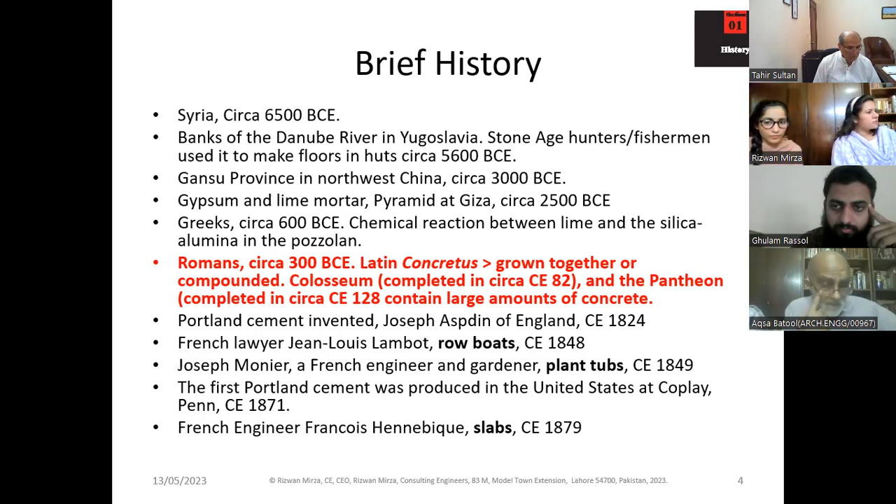I'll begin with a brief overview of the history relevant to today's topic. Instead of reading the slide, I'll just say that the present name of concrete is traced back to the Latin word concretus, which means grown together or compounded. Romans made extensive use of concrete in their buildings. The most well known of these are the Colosseum, CE 82, and the Pantheon, completed around CE 128. They contain a large amount of concrete. But as we will see, the concrete as we know it today was quite different from concrete that can be traced back more than 6,000 years.

The Egyptians also made use of materials which were akin to concrete, but again, not the concrete as we know it today. The Great Wall of China also has materials which are akin to concrete, but not the concrete as we know it today.

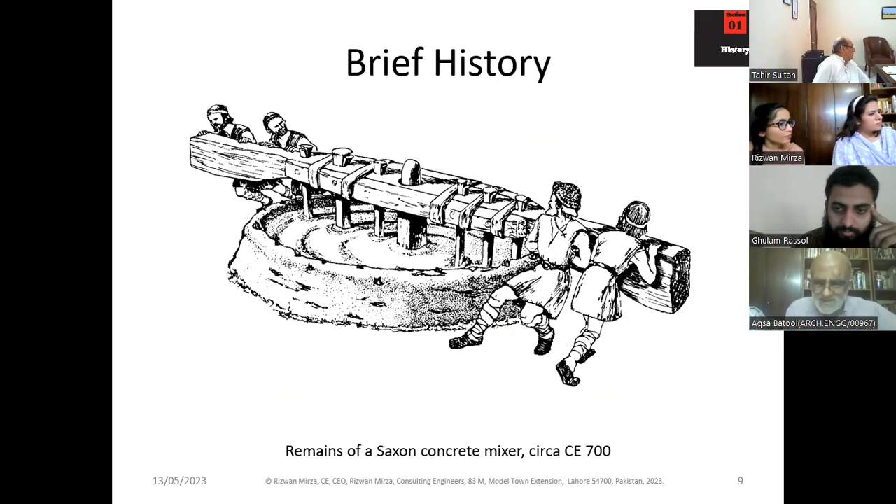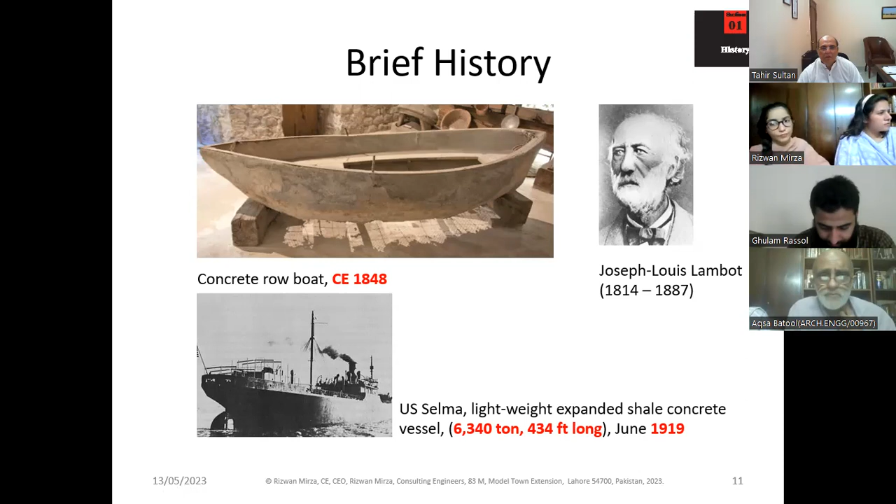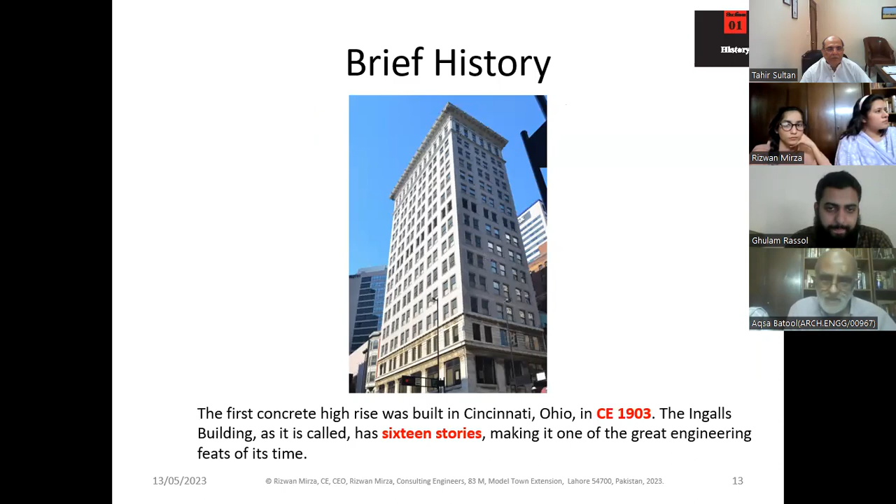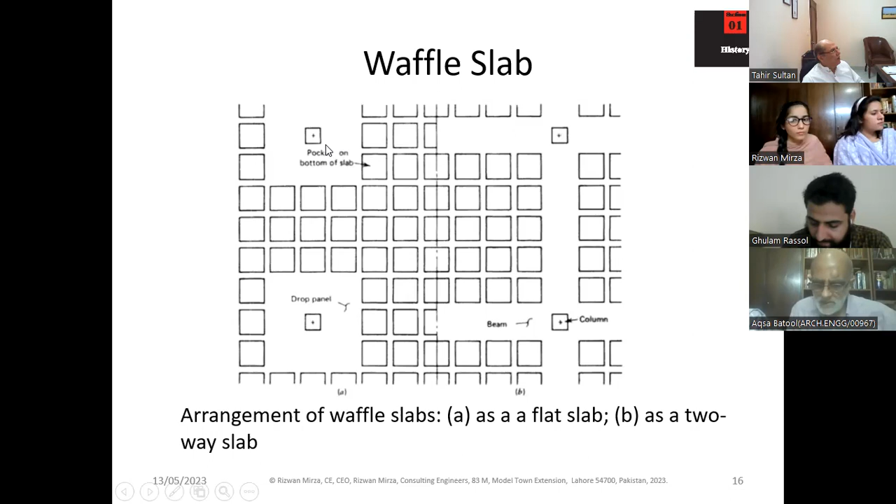So this is a typical arrangement of a waffle slab, with waffles at the bottom. There may be solid lines running along the grid lines, and there may not be solid lines running along the grid lines. This depends upon the choice of the designer.

So the trick would be to reduce the load through the introduction of empty spaces. These empty spaces are a double-edged sword because while you save on concrete, you lose on formwork, because the cost of the formwork would outweigh the advantage gained through reduction in concrete. So as a necessary corollary, larger spans are economically handled when the formwork is repetitive, used at more than one location. Otherwise, even at one location, if one has to handle a large span in concrete, this can be used.

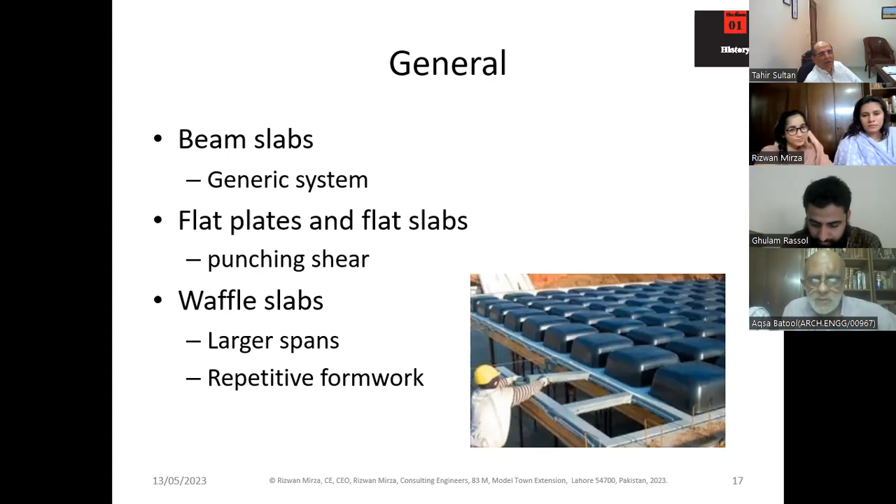This is an introduction to how slabs behave. They behave elastically. There are negative and positive moments, causing tension at the top or tension at the bottom. Within the spans, there is tension at the bottom, and at the top of the supports, there is tension at the top.

While if you continue to load the slab beyond the elastic range, after yielding starts in the reinforcing steel, plastic hinges would be introduced. As the plastic hinges form at locations of high moment, the moment may be redistributed, provided there is enough capacity at the span locations. This means that if the spans have been designed for larger moments than required by elastic analysis, there will be capacity in these spans to receive the moment shed by the supports through the formation of hinges, and the total moment remaining the same, the moments will be redistributed from the supports towards the span, provided there is capacity within the spans.

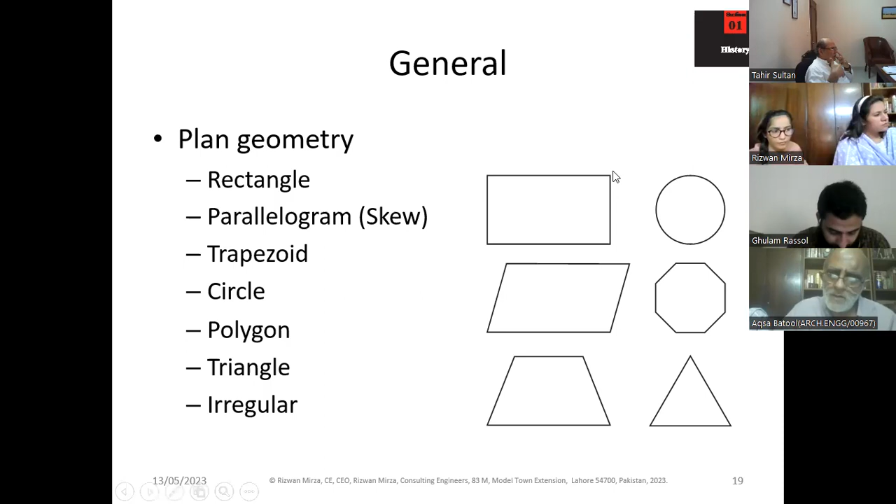This is just an opportunity to recall the various types of slabs that one may encounter during practice, and the diagrams speak for themselves, except that the second diagram at the left here is a skew slab. It enjoys a special position, encountered primarily in bridges, and the bending moments are increased because of the introduction of a skew. Otherwise, these slabs can be handled by one or more of the techniques. More on it later.

The loads can be uniformly distributed. They can be linear, line loads, as we see here, as introduced by the presence of partitions, and they can be concentrated, as we see here - a column sitting somewhere within the span itself with no support underneath. This is a concentrated load, and there may be loading in the nature of a moment at the end of a slab.

This diagram recalls that the location of the loading points needs to be carefully handled, because if you load all the spans at one time, you may not be able to achieve the maximum positive moments or maximum negative moments as required. The first diagram you see is the influence line diagram for span AB. If you load this span and then every alternate span by 75% of the live load, as the codes permit you to do, you will achieve the maximum moment at this location. So this diagram shows: load this span, this span, this span, and do not load these other spans.

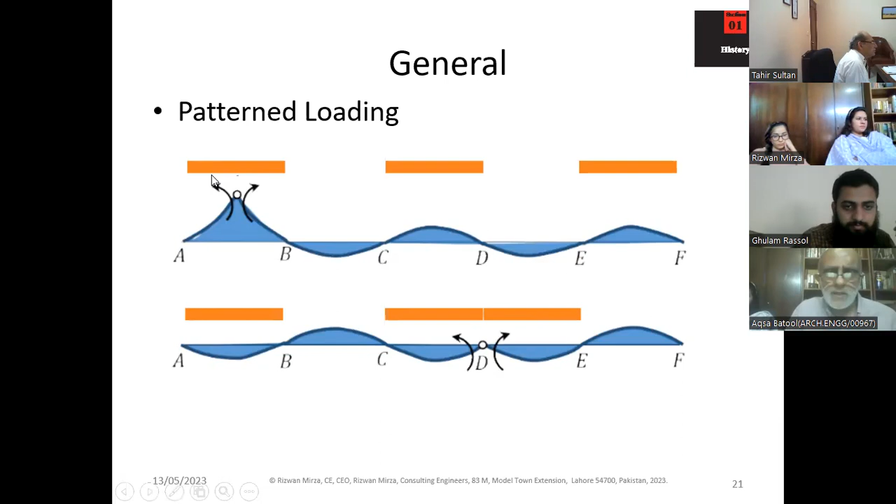The loading would be introduced at the two adjoining spans and then at every alternate span. These diagrams have been prepared using the Müller-Breslau principle, which gives a unit rotation at the location where you are interested in the relevant stress function, in this case the bending moment. So sliding is not permitted, shear is not allowed to perform work, while only rotation is performed, and this angle between the two tangential lines is unity. You can read about it in any standard text on structural analysis.

When you approach the design of a slab, you handle strength and you handle serviceability. Serviceability caters for deflections, it caters for cracking, and it caters for vibration. So you must not be oblivious of the duty to handle serviceability.

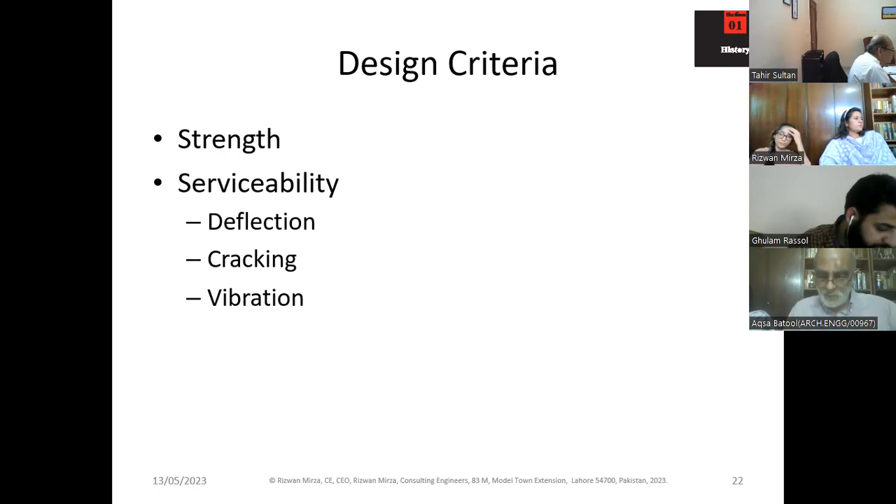Providing reinforcement may not be the sufficient step for ensuring that the slab doesn't fail. Failure does not mean collapse. When a slab, or any element for that matter, fails to perform the intended function, the intended purpose, it is said to have failed. So failure would be characterized by the failure of the element to perform its designated duty.

Now for analysis and design. I'm proceeding rather quickly, I'm aware, but I wish to cover as many aspects as I can so that you can read about these aspects later and fall back on what we talk about here, so that you don't miss out on anything. Slab is a very complex subject.

As you would notice, my chapter or section is a hybrid section, labeled as analysis and design. This is a unique or singular example in reinforced concrete, where the concrete codes of practice provide unified guidelines for analysis and design, because slabs are not very easy to analyze. They are very complex elements. So the designer, working in a design office, needs to be provided mechanisms for analysis as well as for design.

So to keep things simple, I would tend to classify your analysis into two parts: elastic analysis and plastic analysis. Finite element has been mentioned here. It's just a numerical technique which handles cases where the loading is very unusual in its disposition, and where the edges may be very unusual in their geometry, and where the geometry in general is crooked. So one can very easily handle such situations using the finite element technique, choosing the appropriate finite element type, geometry, and size of the finite element itself.

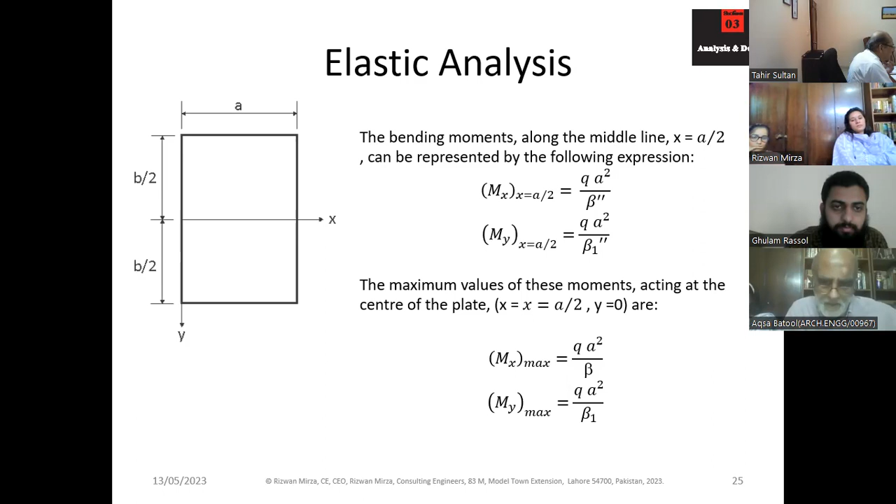These are the coefficients. Mx is the bending moment in the shorter direction, which means stretching the fibers along the x-axis, and My is the moment in the longer direction, which means stretching the fibers along the y-axis.

A short remark at this point would be relevant: the definition of the moment by classical mathematical technique is providing a subscript of the axis around which the rotation, the curl of your finger, defines the direction of the moment. By that concept, you point your thumb along the y-axis, and the curl of your finger provides the positive direction of the moment, which is different from what most software in the market today uses. They designate a moment which is stretching the fibers along x-axis as moment xx, and the moment stretching the fibers along y as moment yy.

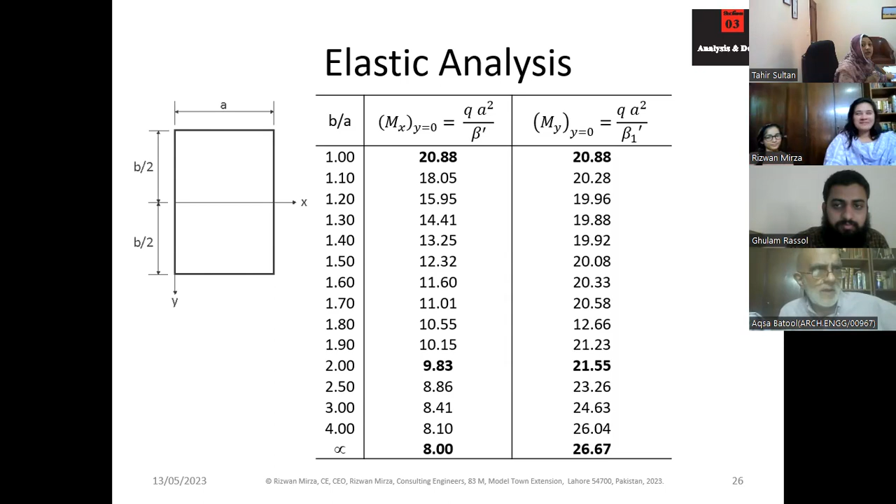So there may be a pitfall for some who are not very careful.

Now, an important thing I wish to highlight is that previous versions of the ACI code, dating back to the 60s, provided coefficients for the analysis of rectangular slab panels. What I need to emphasize here is that those moments were lower than the moments provided by elastic analysis.

This is WL squared by 20, while this is WL squared by 27. This is WL squared by 18. This is WL squared by 22. This is WL squared by 9.83. This is WL squared by 11.35. So there's a reduction in the X direction moment of about 25%, and it gradually lowers. Again, there's a clear trend that the code-based moments are lower than the moments determined according to elastic theory.

The contribution I can make today is that there is a reason why these moments have been kept at a lower value: you have been provided guidelines for designing the slab as a whole, and you provide reinforcement for a large width based on the same moment, recognizing that there is a transverse redistribution of the moments. The adjoining strips would be sharing the moments that first appear on the central strips, which are subjected to the peak moments. So the transverse redistribution has been recognized and used to cut down the peaks to lower levels.

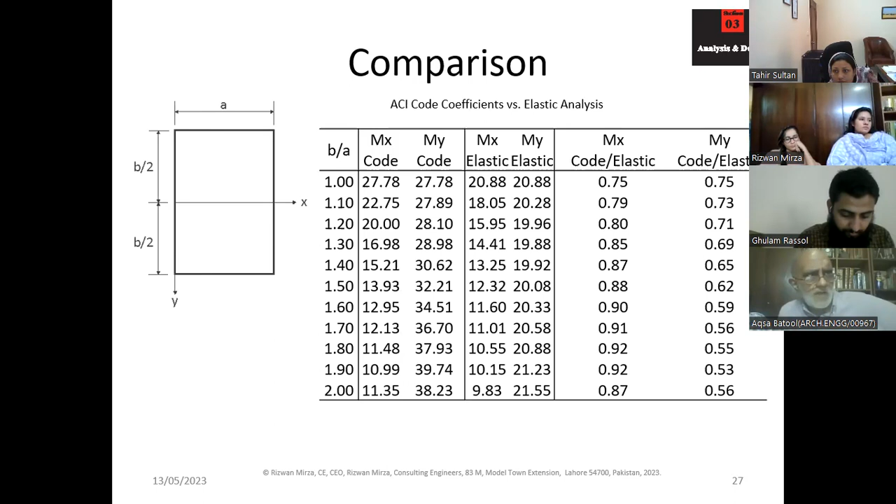This is one reason. Second, there was testing at that time in various universities which determined that the actual load withstood by reinforced concrete slabs is higher than that predicted by elastic analysis. Third, the yield line theory had appeared by that time, and use was made of the modified yield line theory to change the options provided within the slab.

Hence, to summarize, one should expect that the code-based elastic moments, as they appear in older textbooks and older versions of the codes, are lower than those we can notice in the classical textbooks of theory of elasticity.

Now, I have a very limited time, so in some locations I will just be identifying the principle and will not spend as much time on each slide as I did on the previous slides. This is a triangular slab, and I just wish to say: take an inscribed circle and design this slab as an inscribed circle, providing that reinforcement for this triangular slab.

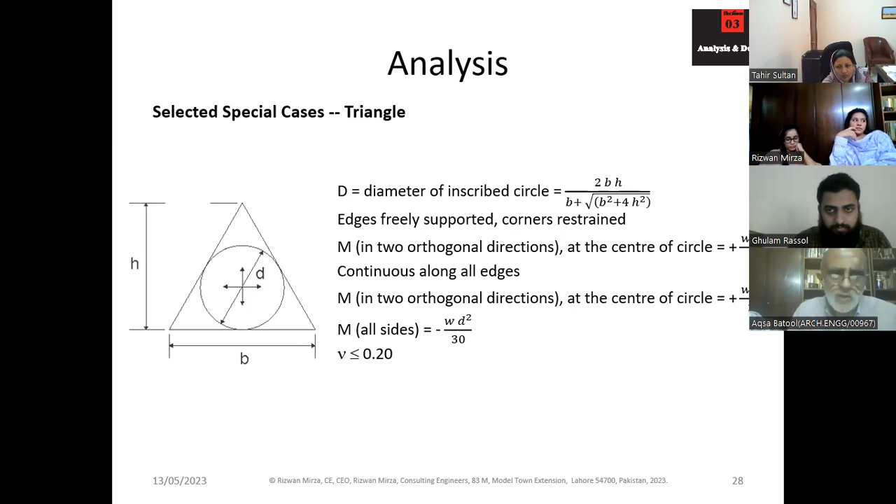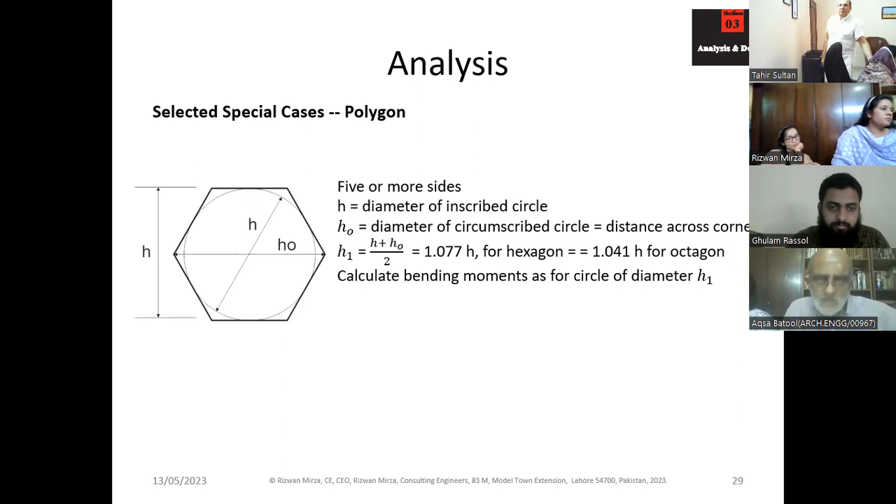This is a polygon, and if it has a number of sides which is 5 or more, again design this as a circle. The inscribed circle has a diameter h. Use that diameter and design the slab.

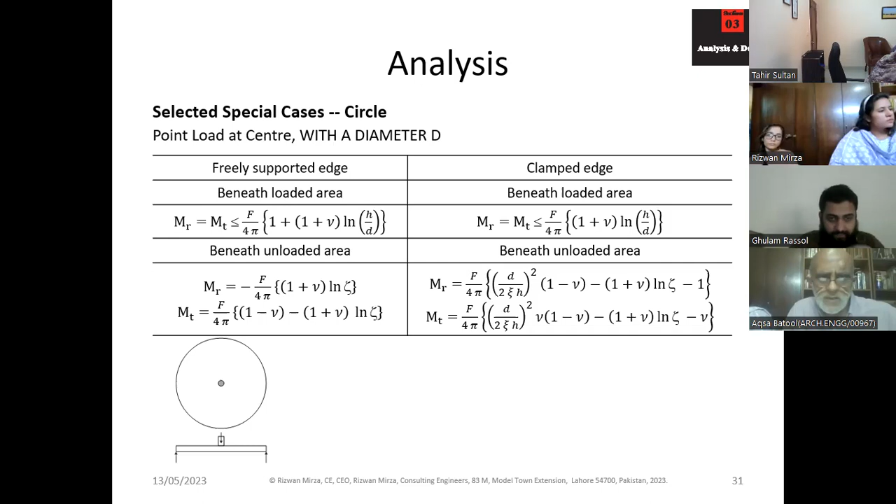Now, a very important and common issue related to slabs is handling the line loads, the partition loads, through European guidelines, probably handling very low weight partitions.

If Q is equal to about 68 pound per foot, or less than 68 pound per foot, our Q is between 137 and 68.5 pound per foot run, and for cases where Q is less than 205 but greater than 137 - these are very lightly loaded partitions. So you end up, according to these guidelines, with loads equal to 10.44 pound per square foot, 16 pound per square foot, and 25 pounds per square foot.

By the way, these guidelines are not very different from what you will encounter under the British standard, which is more general, where you are not restricted by the loading that have been provided. This just says that if you know the loading per linear foot of run of your partition in pound per foot, divide it by 10 and you get the load in pound per square foot.

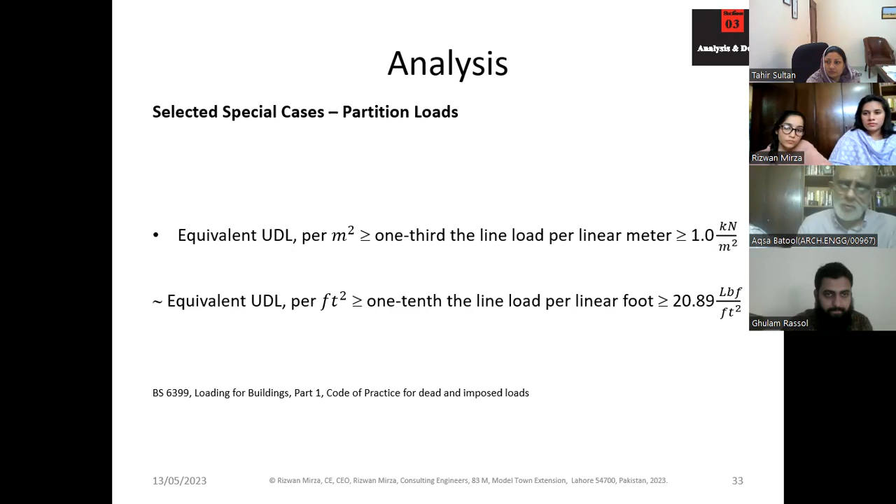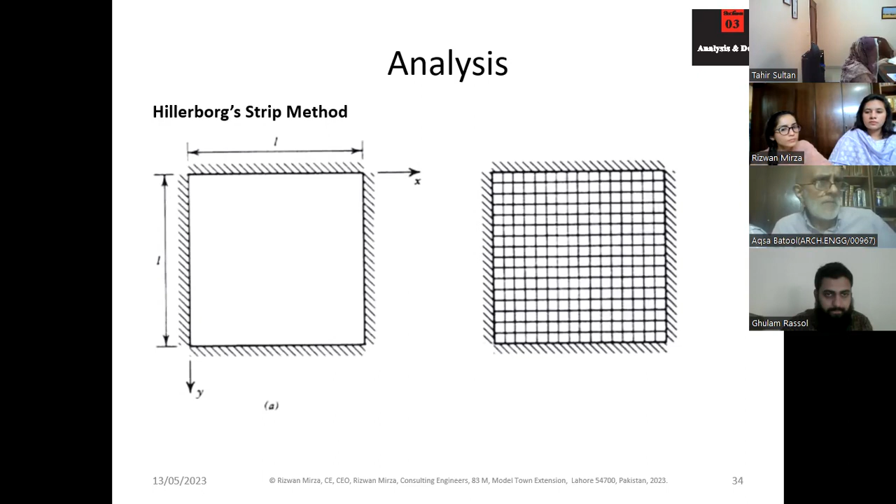I have developed guidelines for you. Again, this is very arbitrary. You can handle it either by dividing the slab like this, dividing the slab like this, or dividing the slab like this. In the first part, you say that 50% of the load is taken in the x direction, 50% of the load is taken in the y direction. So W by 2 in the x direction, W by 2 in the y direction.

And you get W by 2 into X square by 8, which is WX square by 16, as the bending moment in the X direction, while the moment in the Y direction is again WY square by 16. The distribution between X and Y direction can be made assuming that the fraction of the loading in each direction would be the length of the opposite direction raised to the fourth power, divided by the length of that direction raised to the power 4 plus the length of the orthogonal direction raised to the power 4. So that can be used as your guess. It remains a guess - this is not an elastic analysis.

This again is another method by which you divide the slab into edge strips and the middle central strip of L by 2, and edge strips of L by 4. And here you assume that 50% of the load is going in this direction, 50% of the load is going in this direction, assuming that the slab is square.

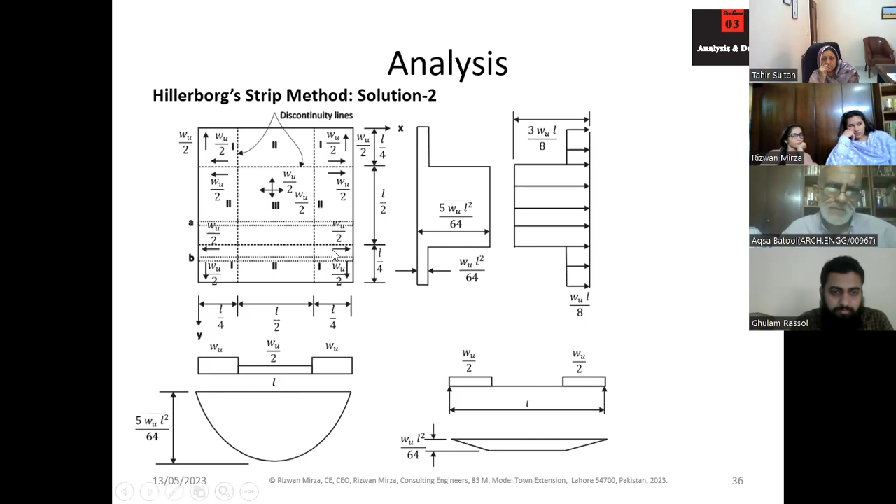This is what other theories also suggest, that the edges are subjected to very low forces when they are supported edges, that is, when you are separately designing the beams, not coupling the design of the beams along with the slab. According to some codes, if the edges are very rigid, say like walls, or if you are separately designing the beams, these areas can be designed using minimum reinforcement, temperature and shrinkage reinforcement.

This is a third method. I will not waste a lot of time here. Let me move to yield line theory, which is another plastic analysis technique. Yielding starts in the slab in this direction. It proceeds towards the corners, and a mechanism is formed when the yield lines have reached the corner.

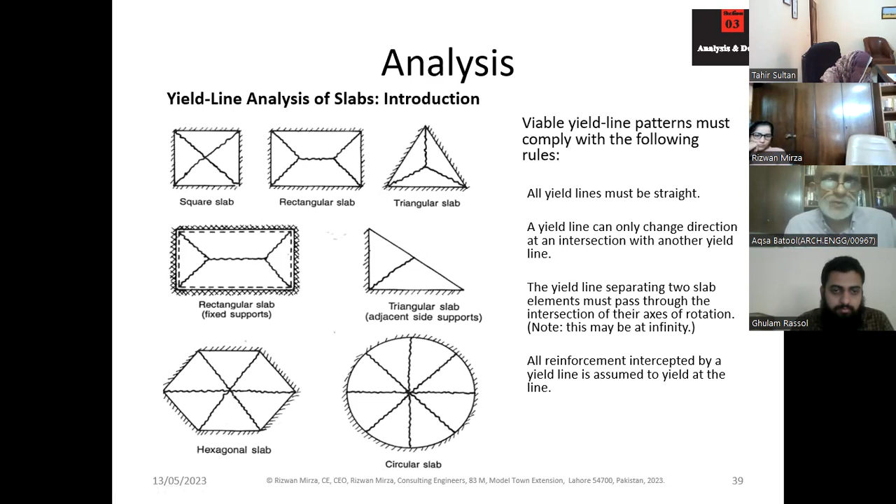These are the various types of configurations of yield line that we see in various types of slabs. You can find out the forces carried by these slabs, the loads carried by these slabs, by using yield line analysis. I've used a simple one-way slab fixed at the end, assuming that the top moment capacity at the left is 6 kip-foot per foot. The top moment capacity at the right support is 10 kip-foot per foot, while that near the bottom, near the center, is 4 kip-foot per foot.

Knowing the properties, which means that the slab is not isotropic, and this is not having the same property at all locations, the reinforcement arrangement is different. The question is, what is the load that this slab can carry? I do not know where this yield line will be formed. I assume that it is formed at a location X.

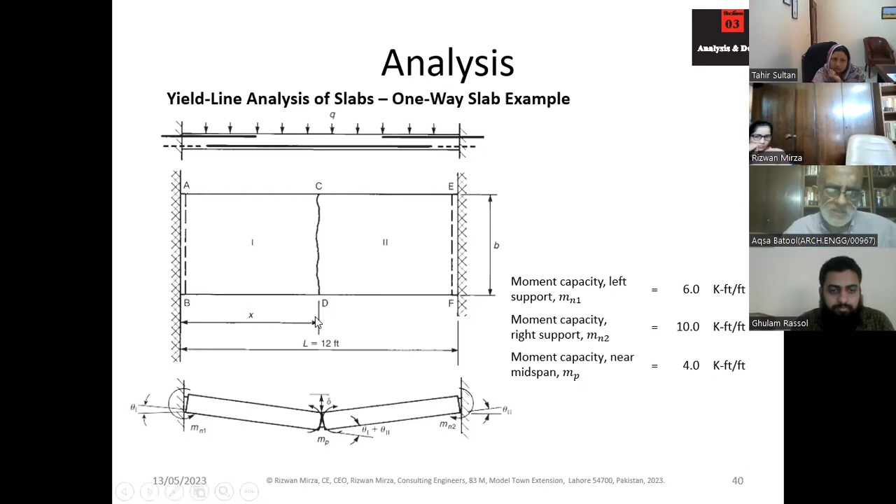At a location X, you set up the hinge, and the principle is that you equate the external work done to the internal work done. External work done is the loading multiplied by the projected displacement of the entire area, using the centroidal movement. When you do that, you get the work done by the left part and the work done by the right part, and this can be very easily computed.

Using these equations, W into delta C, it's sigma of this. Delta C is the deflection at the centroid of that segment. So the UDL would undergo a movement which can be computed if you know the movement here. If you say that this is delta, you can go to this location where the centroid is located. In this case, it is half of this, and you multiply the load with the movement, that is the centroidal movement, and that will be the work done.

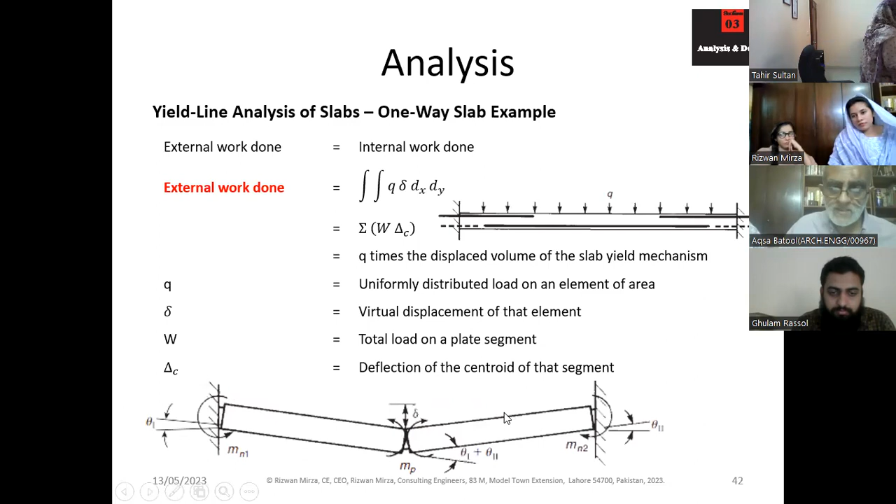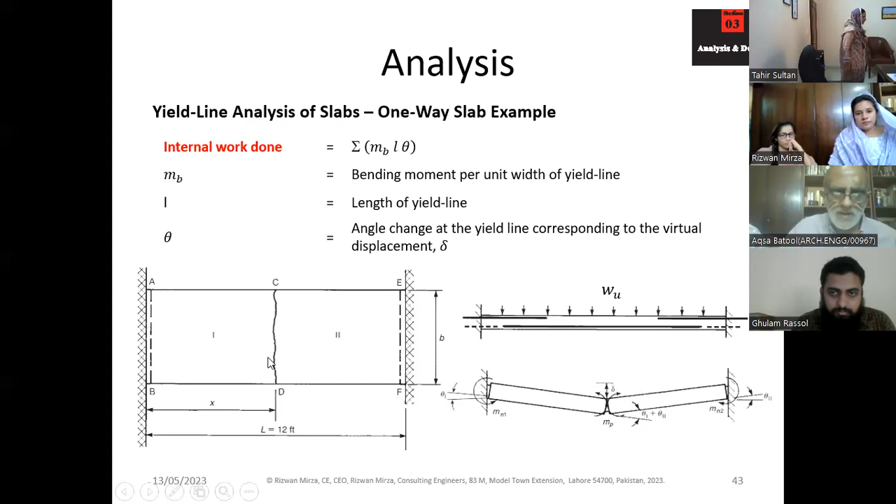Similarly, the rotation multiplied by the moment, plastic moment at the center, will be the internal work done. When you equate the internal work done with the external work done, this is a very simple equation.

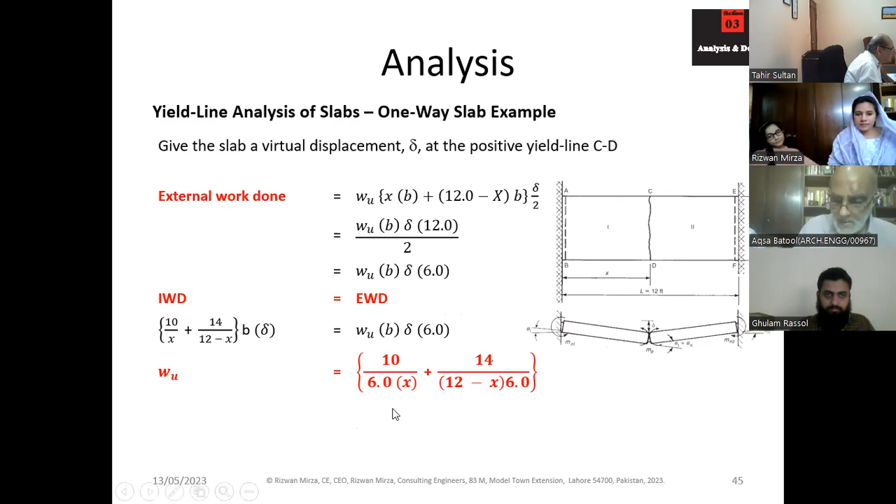The answer that you need is the location of x. You use different values of x and you find WU, which you can treat as the safe load for the slab, and you find that it is somewhere in between. So you say that 0.662 KSF is the load that this slab can be subjected to, and the location of the hinge would be at 5.5 feet.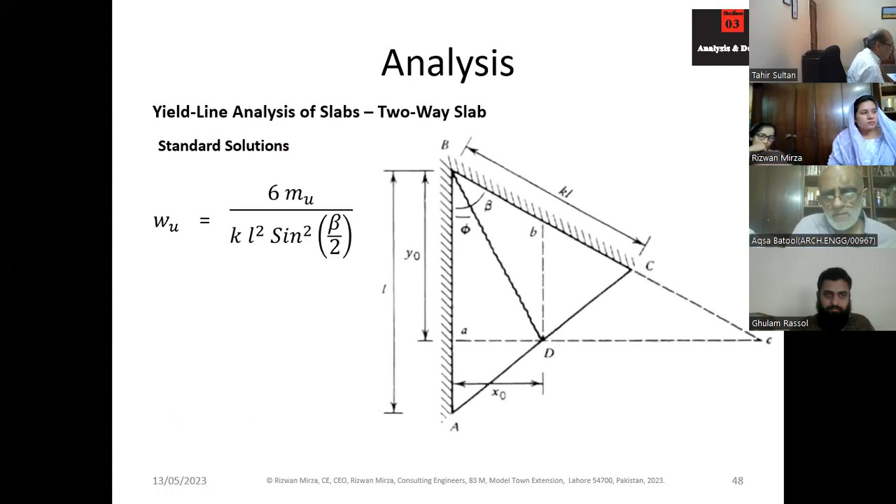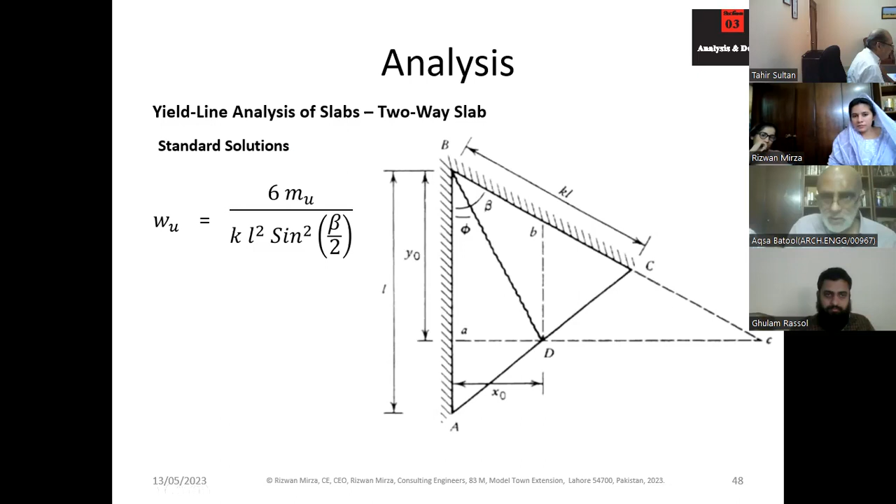So this is a quick demonstration. This is a standard solution for a rectangular slab; you can look it up in any textbook. This is a standard solution for this triangular slab with two edges, not necessarily equal, with fixed edges and a free edge, completely free, no support at all. The equation has been given, you can determine the load. Go on.

Now let me move on to the ACI method. ACI provides two methods which are essentially the same, except that in one approach you undertake a longitudinal analysis, as one would be expected to in all cases, and in the second approach, the code provides simple guidelines, and you do not have to perform a longitudinal analysis.

The code says that you can use the code-specified method or any other method which satisfies the strength criterion and which satisfies the serviceability criterion. So don't say that if somebody adopts a different criterion, it is non-compliant with the ACI requirements. But you have to demonstrate that serviceability and safety have been ensured within the meanings of the code.

Equivalent frame divides the slab into two directions. Each direction is a beam slab to the center line of the next transverse span. This is the direction of analysis, this direction - this is direction 1, this is direction 2. To the center of the next span, you cut off the entire thing, and to the center of the next span on the left, you cut off the entire thing, and this becomes the beam slab. This is direction 1, this is direction 2, this is the column, and this is the beam slab.

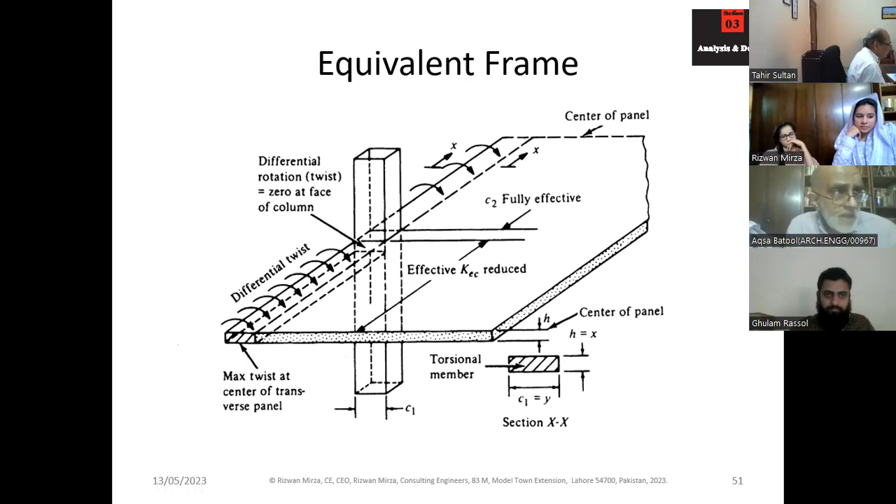Whether they are with beams or without beams, ACI provides only a unified treatment of beam slabs. It's very important for you to understand that when you say there is a beam underneath the slab - if the beam is projecting only 1 millimeter below the slab, would you by common sense designate it as a beam? Probably not. If it is projecting 1 meter below the slab, would you designate this as a very rigid beam? Most probably, for many values of span, you would say this is a fairly rigid beam.

So the very word 'beam' doesn't mean that there'll be a very large shear resisted by the beam. Basically, the loading is distributed between what is known as the column strip and what is known as the two middle strips. This is the column strip - this is a rigid part because it is in line with the columns. The remaining part is the middle strip.

If you have a beam here, the beam would take a lot of moment in this region, and the slab surrounding the beam would have to shed that moment and apportion it to the beam. This is it. So we cannot say that first I will design the slabs, then apportion that load to the beam, and then design the beam for that loading.

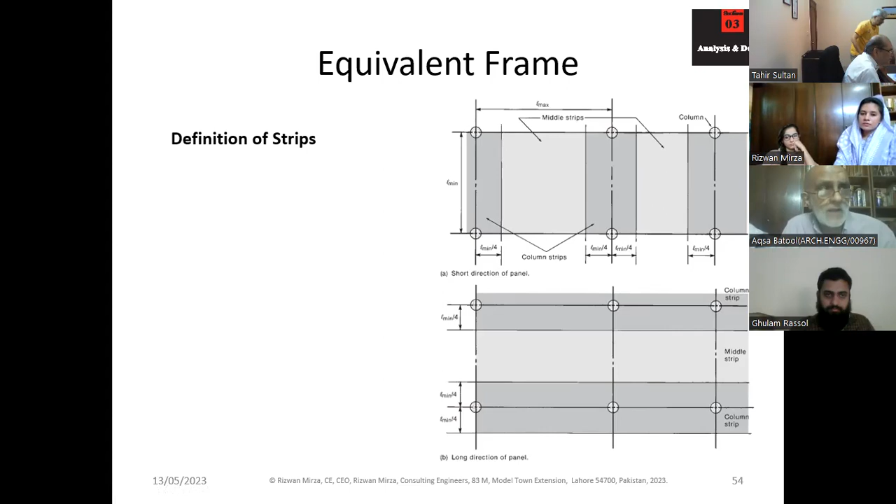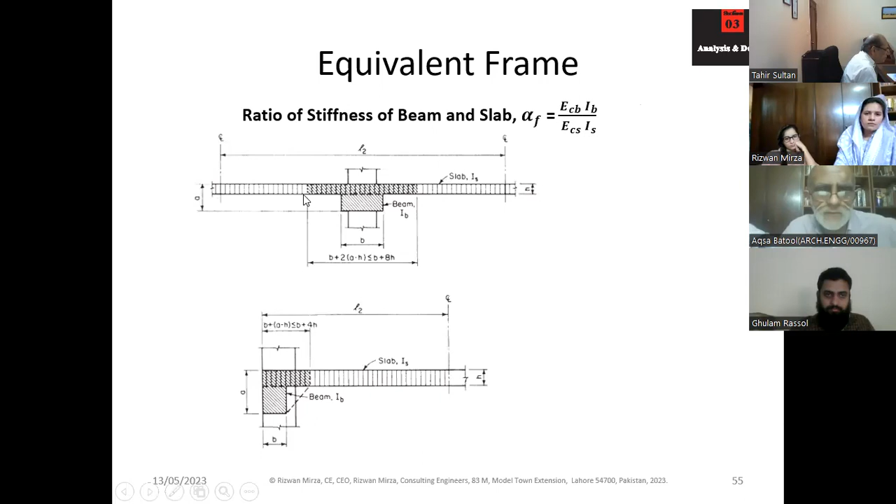Now this is what you do: the moment is transmitted to the middle strip, and it is transmitted to the column strip. The column strip moment is transmitted to the beam - part of it - and part of the moment is transmitted to the slab. That part of the moment which is transmitted to the column strip slab is again divided into a width, which is the transfer width - the width of the column in the direction of analysis, that is C2, plus a slab width equal to 1.5 times the thickness of the slab on each side.

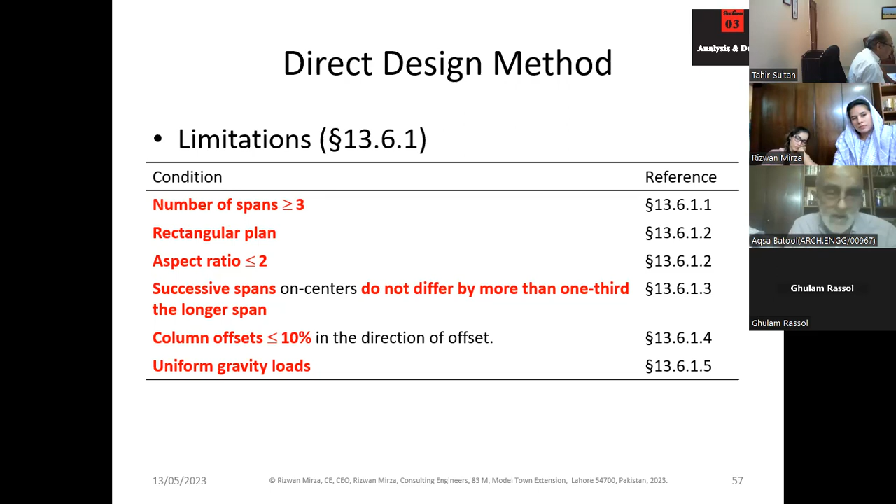The direct design method, which gives you the freedom of not making a longitudinal analysis of the beam slab system, requires at least 3 spans; the slab should be rectangular panels; the length to width ratio should be at most 2; the shorter span shall not differ from the longer span by more than 1/3 the dimension of the longer span. Column offsets in each direction shall not be more than 10%, and it can handle only uniform loading, with live load less than or equal to two times dead load. That's it - no redistribution of moments is permitted.

So again, this is the same division. Remember that whether you are analyzing in the X direction or the Y direction, the column strip width is always determined by the shorter direction at each location.

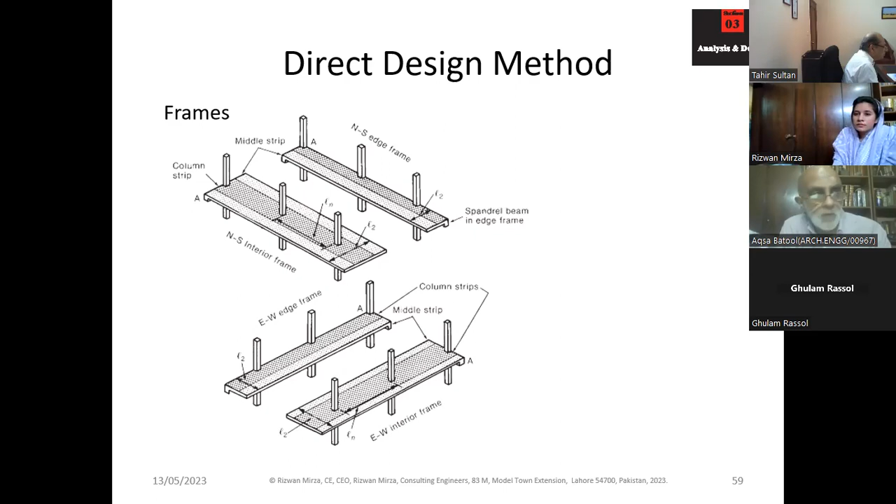If you are designing in this direction, you look at the two directions, and the shorter of the two spans would be the governing span. You use half of that span for computing the width, and the remaining part, or the residue, would be designated as the middle strip.

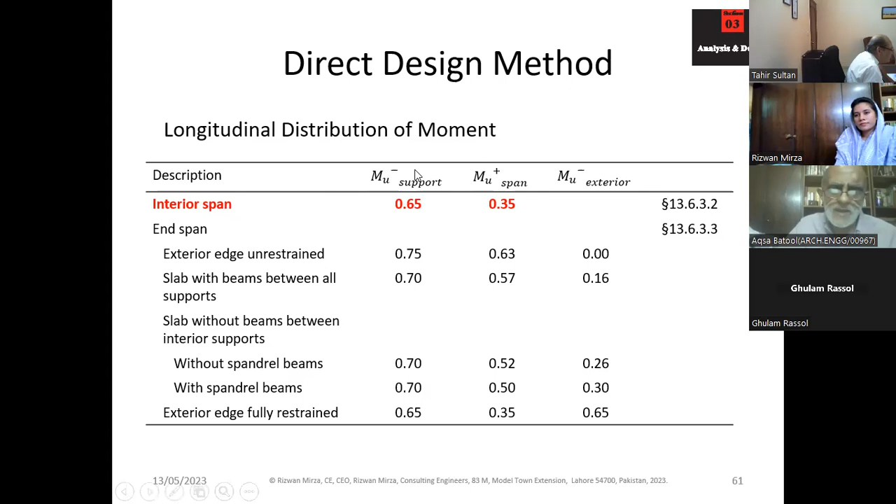Now, the direct design method, which is easier, is introduced as a simplified method. It says you take the full width of the slab, multiply it with the load, and compute the total static moment, which is WL square by 8. Then the code tells you how to distribute this total static moment to various supports. For an interior span, 65% goes to the support, 35% to the span.

Similarly, for other locations, the code provides guidelines in tables. For the interior negative factored moment, L2 over L1 must be determined. For the ratio 1, it is 75%. For the exterior negative factored moment, when beta T, the torsional ratio between the slab and the beam, is 0, 100% shall go to the column strip.

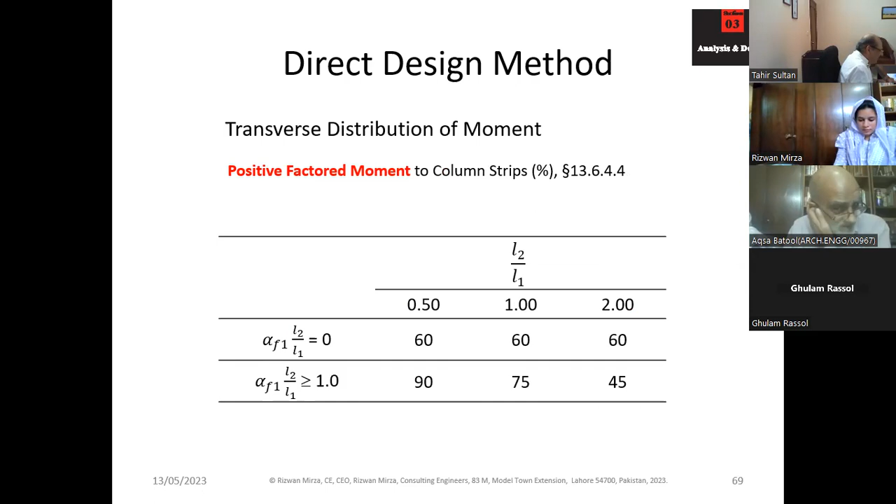And the positive factored moment in the column strip is 60%, when alpha F1 into L2 over L1 is 0. So it's very sensitive to the aspect ratio of the slab panel. L1 is the direction of analysis, and L2 is the direction perpendicular to the direction of analysis.

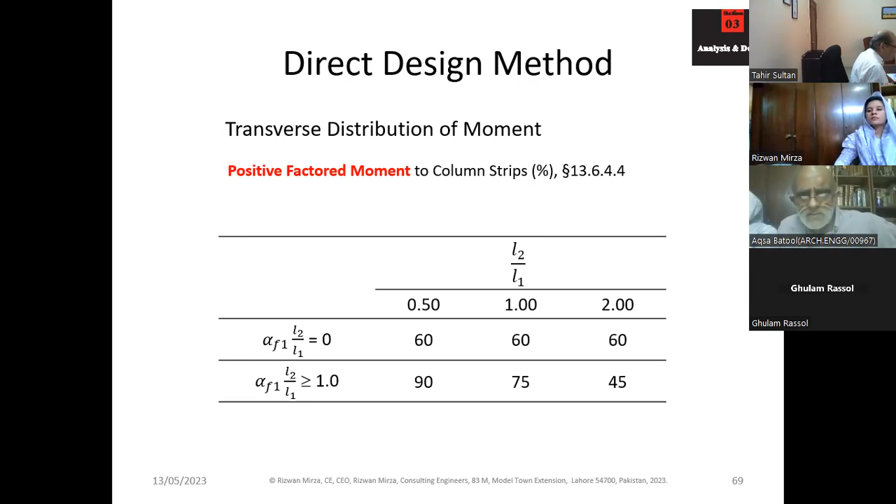So this is just a summary of how the table behaves. When L1 over L2 increases, the width of the column strip increases as a function of the total width, and this is what you must note. So its share increases. Column strip share increases as L1 over L2 increases, that is, length in the direction of analysis divided by length perpendicular to that direction. So the share of the column strip increases.

Alpha F1 increases, which means the beam is very stiff, and since the beam is part of the column strip, the share of the column strip increases. When beta T decreases, meaning the slab is free to rotate at the end, the torsion is not there, so the share of the column strip again increases.

Otherwise, the moment is taken to the middle strips through the use of the strip beam, which is the spandrel beam, called the spandrel beam.

This is another issue, transfer within the width, which we have already talked about. That is, C2 transverse to the direction of analysis, plus 1.5 times H in this direction, and 1.5 times H here. So this is the width of the slab within which every moment that is to be transferred between column and beam slab has to be made.

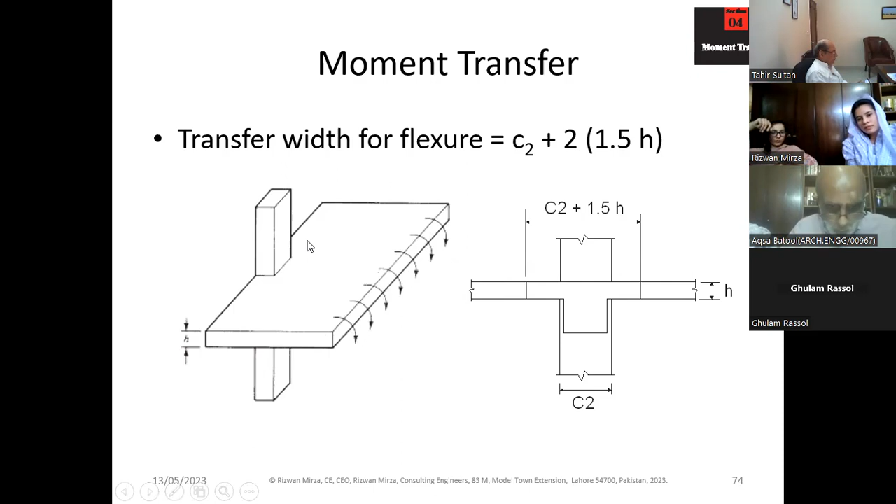Similarly, in the case of lateral loading, the entire moment will be transferred from beam slabs to the columns, and this is the width in all cases required to transmit the loading from beam slab to the column. The moments applied here cannot be transmitted here since there is no column in front of these strips, so the code gives you a very narrow band from which you can make this transfer.

How much moment is to be resisted through flexure? This is the code-provided equation: flexural share is 1 divided by 1 plus 2 by 3 of B1 over B2 under root. B1 is the direction of analysis dimension, and B2 is the orthogonal dimension. For a square column, this becomes 60%. So when this becomes 0.6, the other becomes 0.4. The sum remains the same.

This graph shows that the blue line is the flexural share of the moment to be transferred, and the red line is the shear. When 60% load is being transferred through flexure, 40% load is being transferred at this aspect ratio. You can read this graph or you can directly use this equation.

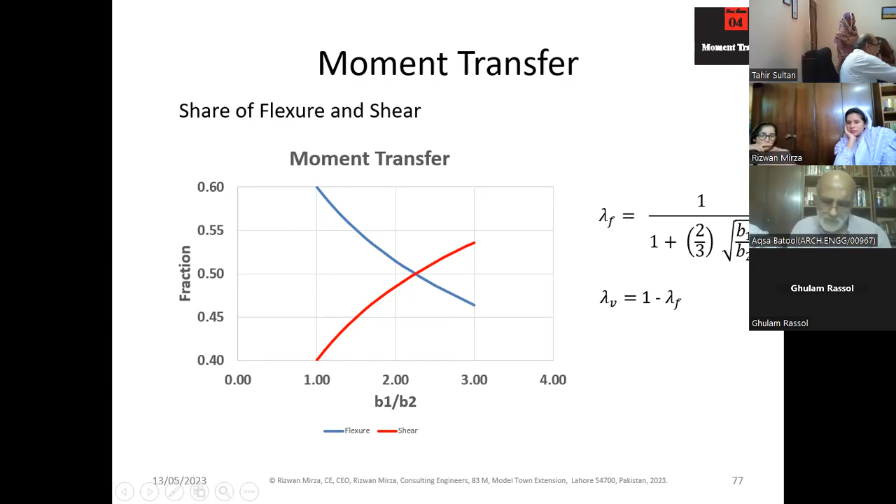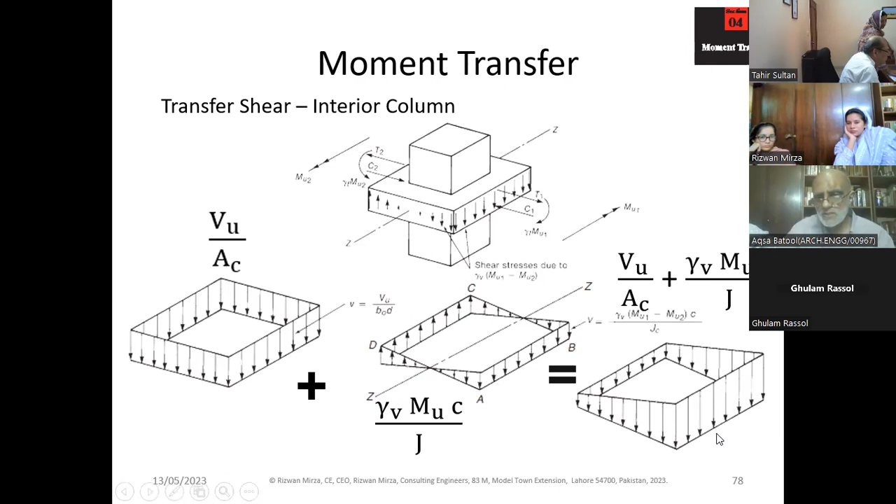So this is what shear transfer looks like. The moment transfer is acting here, and this is the direct shear, and this is the torsional shear. When you combine the direct shear with the torsional shear, this is what you get. The shear is increased here and decreased here. Similarly for Mu1.

These are the coefficients used for determining the value of the stress. These coefficients J and C are provided within the code. You can use them here. I do not have enough time to cover it here.

Reinforcement guideline is provided within the code. 0.002 of the gross area of the slab is the minimum for grade 40 or 50. For grade 60 reinforcing steel, 0.0018 is the minimum area for grade 60.

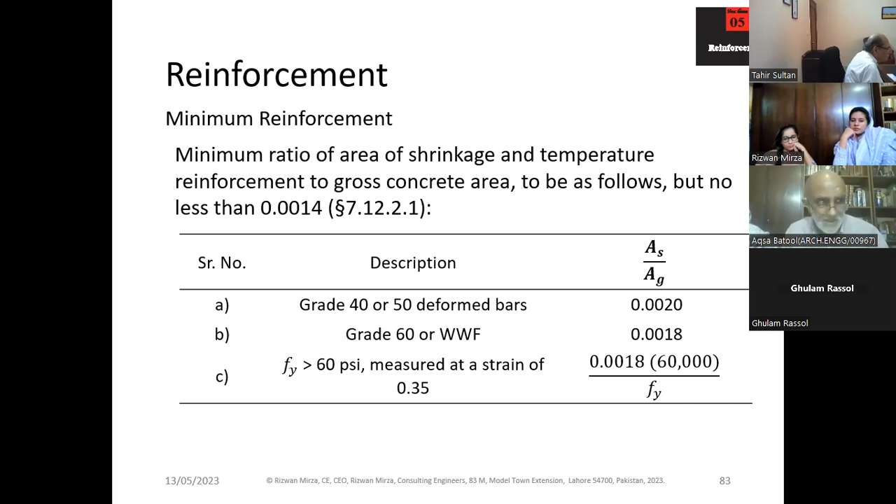Remember that unlike the case of beams, it's the H which is used for determining the concrete area. That is width of the slab, unit width, multiplied by the total thickness of the slab, not D. When you determine the minimum reinforcement of beams, D or the effective depth is used.

Maximum bar spacing at critical locations is 2H for a mat, for a loaded slab on grade. Other than critical sections of one-way or two-way slabs, it is 3H, less than or equal to 18 inches. At locations where there is no bending, it is 5H.

The values, the numbers, were very different when I started my practice back in the 80s, but they have been modified greatly with time. If anything, the spacing has been reduced, because a large amount of cracking has been noticed in the slabs.

Anchorage is a very important issue. I will approach it simply: if you increase the diameter of the bar, the area of the bar would increase by the square of the diameter, while the perimeter of the bar would increase linearly. So as you increase the diameter, the perimeter will not be able to keep pace with the increase in the square, with the increase in the area.

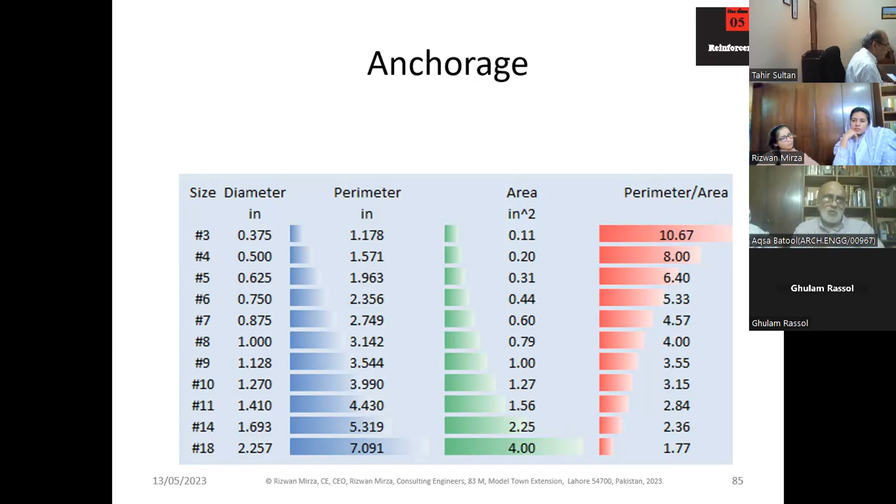Area reflects the force that will be generated, while the perimeter reflects the surface available for transmitting that force to the surrounding concrete. So the ratio between perimeter and area becomes very disadvantageous as you move towards larger diameters, and they become very difficult to anchor. At certain diameters, the code doesn't even provide the freedom for lap splices.

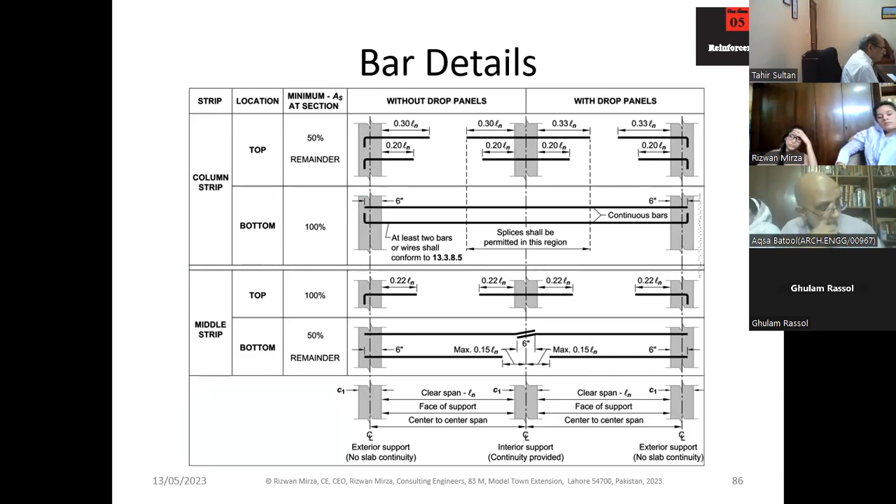This is how you terminate your bars. You can look it up in the code, there is nothing for me to repeat here. This is just to tell you that the column strip and middle strip are treated differently, and that's it.

Shear has two parts, two-way shear and wide beam shear, but I must say that shear is shear. Whether it is acting around a column or acting along a line, a shear is a shear, and it has disastrous effects. It is a non-ductile failure.

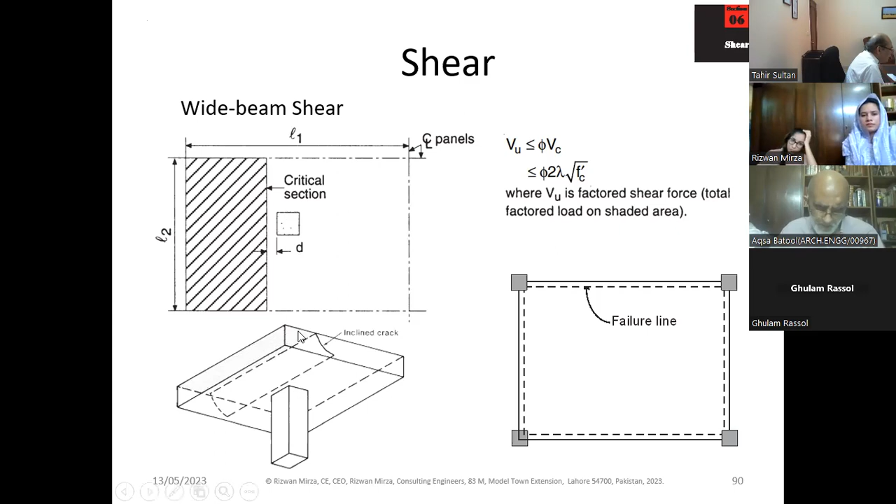It is sudden, and there is no redistribution. The two-way shear, the one-way shear has this nature of crack, and 2 F sub C prime under root is the allowable value for the permitted stress. Two-way shear has a formula for allowable stress, which at best can yield 4 F sub C prime under root of the allowable stress, but the formula reflects

the aspect ratio of the column, 2 plus 4 over beta, and when this is 2, 4 divided by 2 becomes 2, and 2 plus 2 becomes 4. When the aspect ratio becomes long, or the column has a look in the nature of a wall, this advantage of higher two-way allowable shear is gradually lost, till such time that you practically end up with 2 F sub C prime.

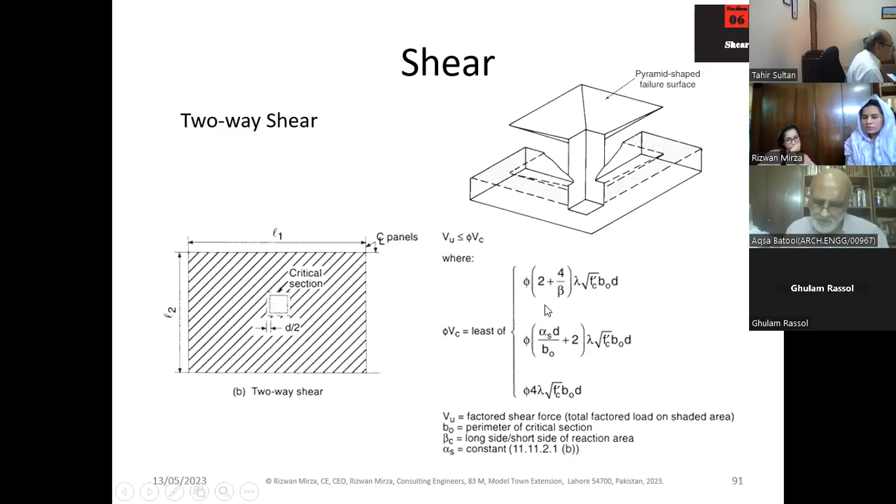You can read about it in a textbook. The perimeter should be the minimum that is possible for the shape in question, but need not approach closer than D by 2 to the element involved. This is the typical example of how you would handle the slab design.

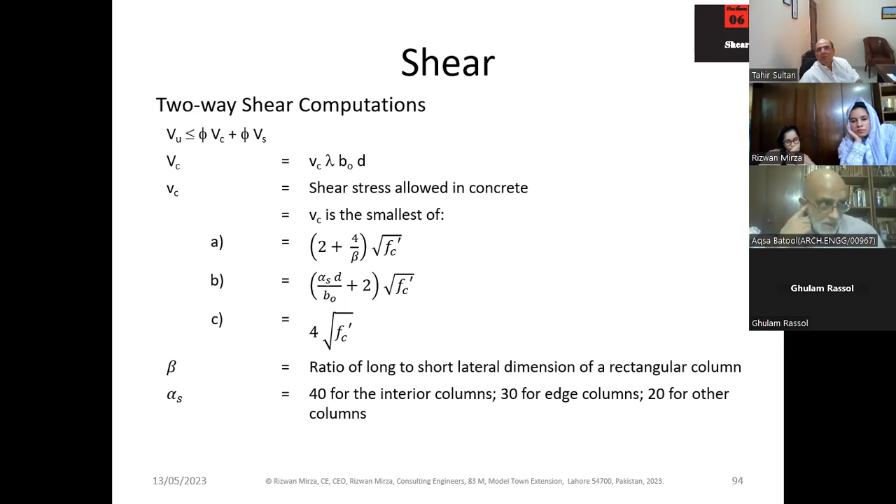phi V sub C plus phi V sub S should be greater than or equal to V sub U. But remember that whenever you are using reinforcement, the advantage of using 4 F sub C prime under root, or a higher value than 2 F sub C prime under root, has to be surrendered. It will be reverted back to 2 F sub C prime under root, and you will compute your calculation.

You will have an effect on shear, and the code says that if the opening is within a distance of 10 h from the center of the element, just join the edges with a straight line and do not include this perimeter within the capacity. This is a simple guide.

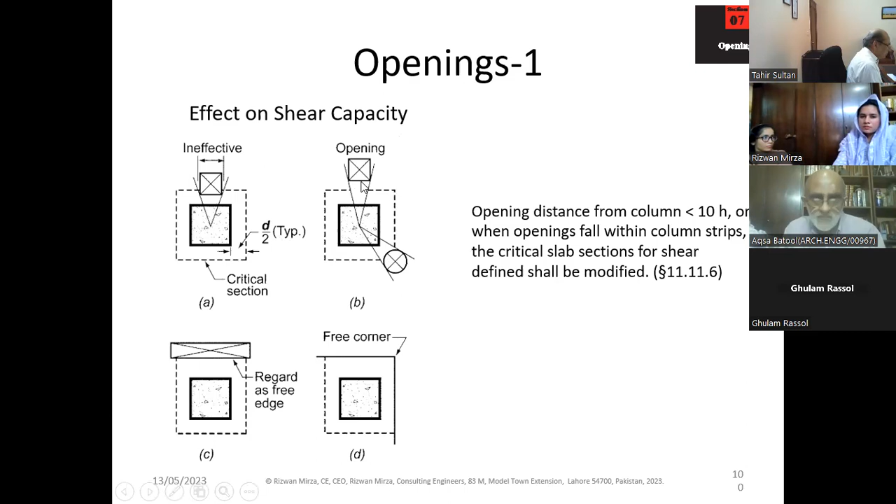But if you take my advice, of course, as an individual, the code is the final authority, I would tend not to have any opening in this region. It's a very dangerous thing to do because the entire moment is concentrated in a column strip.

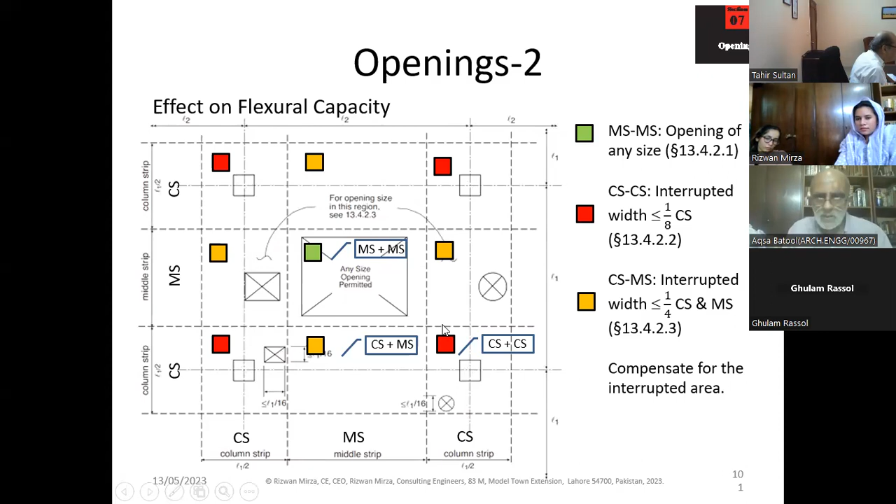Once you have decided on the permissible width of the opening, you have to provide the capacity, eke out the capacity shortfall through introducing additional reinforcement. That has to be done in any case, which does not mean that you provide this opening and then forget about the loss of flexural capacity. You have to eke out the capacity shortfall through providing additional reinforcement around the opening.

Deflections are handled by a method called the deemed to satisfy method. You use the code specified procedure for one-way slabs: L by 20, L by 24, L by 28, L by 10 for cantilever, and this is percentage. This is the H. But don't say that I've used this and still my slab has deflected. This is for usual loading. If your case is unusual, be careful.

Two-way slabs. Well, this is the formula. When the alpha m is not very large, use this formula. When the alpha m is greater than 2, use this simple formula.

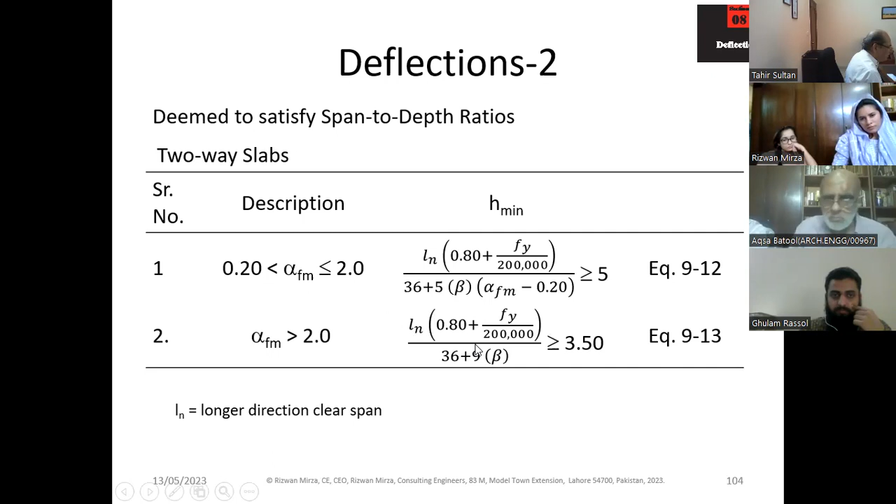For two-way slabs, this is the type of answer that you get, and alpha is less than this. The code provides you with guidelines, it doesn't provide you with the formula. It says that this is the actual number by which you will divide your span when the alpha m is very low. You are moving towards flat slabs, as you would call them.

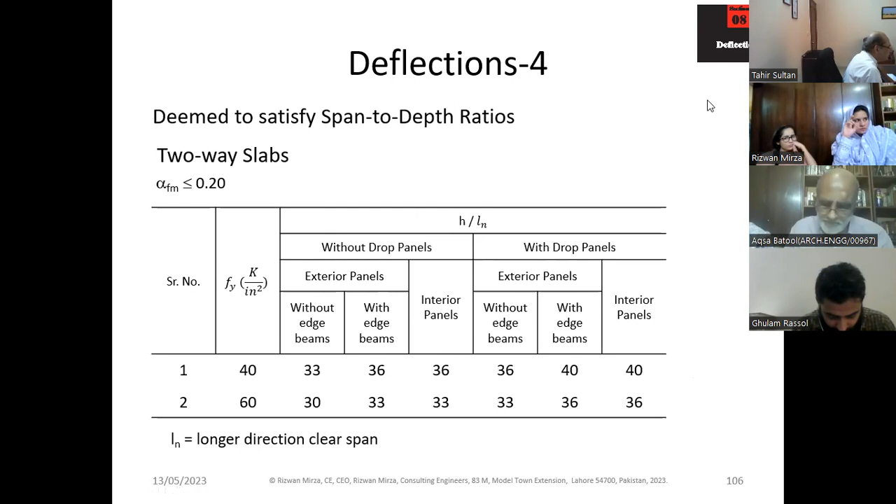This is the summary of the code provisions. Now you can also adopt not to use deemed to satisfy criteria. You can compute the deflection by one of the techniques. This is where I have computed the delta maximum for a uniform load over the entire plate.

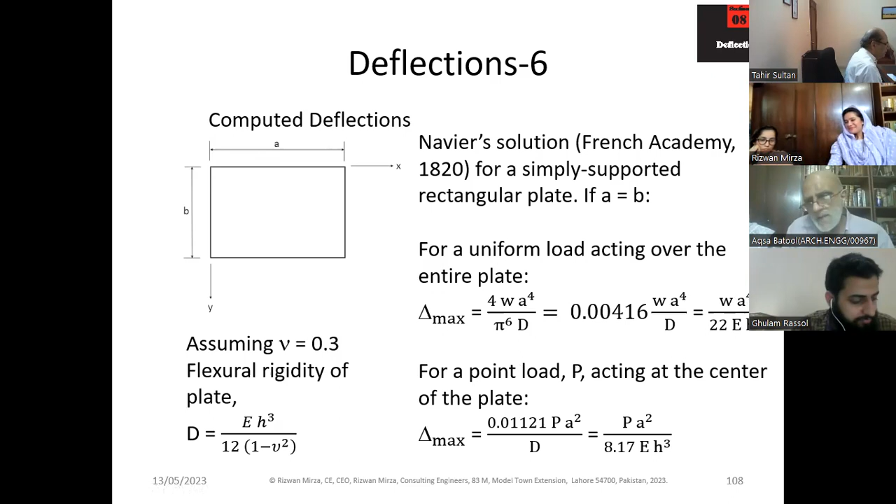For a square plate, the answer is WA4 over 22 Eh³. You can use it, and use a multiplier to account for long-term deformations, and then say whether you accept this deformation or you don't. This is the number that may be used for non-square plates. This is the multiplier for long-term deformations.

In a span of say 5 years, the number becomes twice as large. For sustained loading, you multiply your sustained deformation, deformation under dead load becomes about double.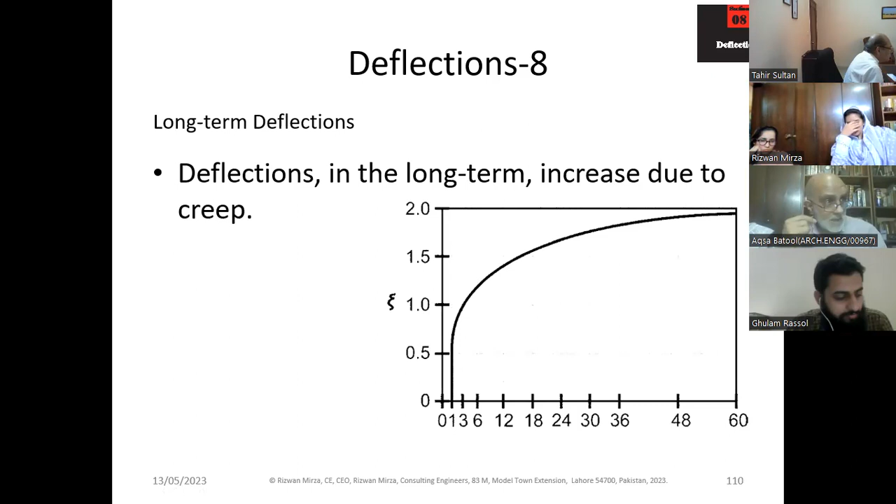But the deflection is not measured this way. It is dead plus live plus creep - that is long term. So the criterion is L over 240.

Read about it, I'm sure that you will find other researchers have gone for much lower values, L over 1500. And they say that unless you do it, you should be ready for cracking within your partitions.

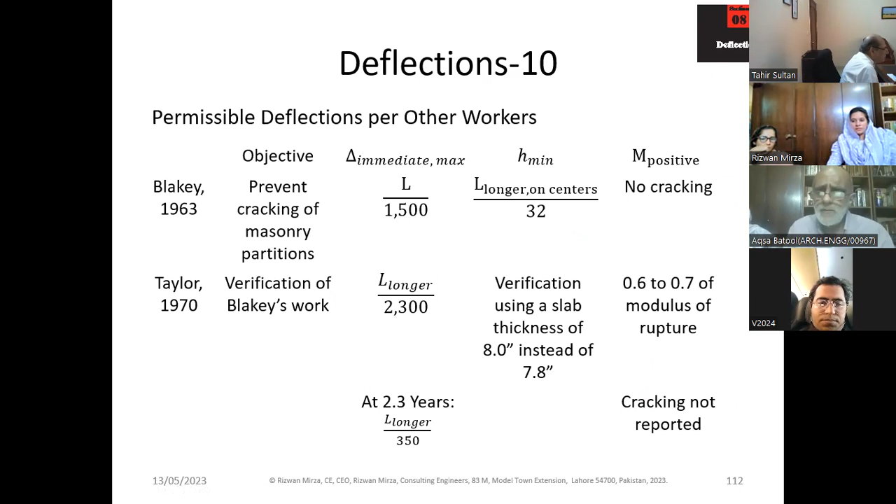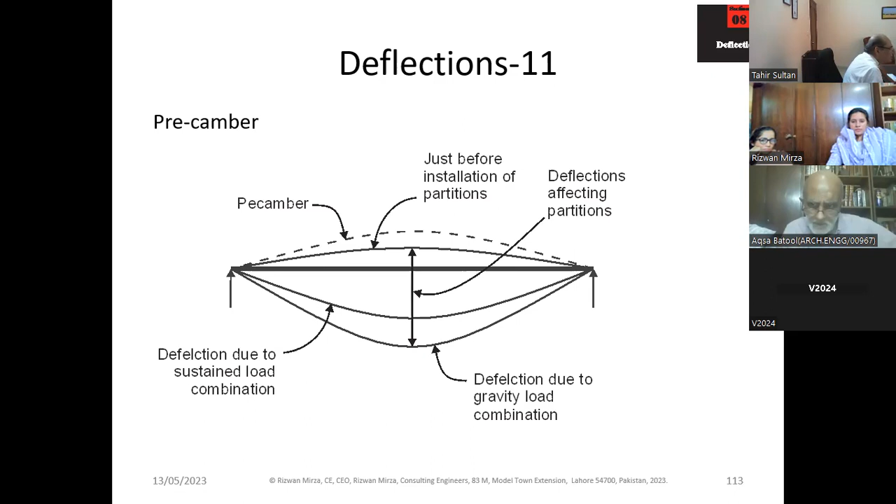So when that movement takes place, it needs to be noticed, whether it occurs after the introduction of partitions or before the introduction of partitions. Cracking needs to be handled.

In the 70s, high strength steel was introduced - grade 60 - and strength design methods were introduced. Reinforcement was halved by the strength design method, and the reinforcement was divided by about 1.5 by the use of high strength steel. So the strains were increased by about 3 times, and this resulted in the onset of cracking.

Measures are: use low, closer bars, small size bars, used closely spaced, to reduce your stress. The code also provides you with the maximum value, but you should keep your eyes open.

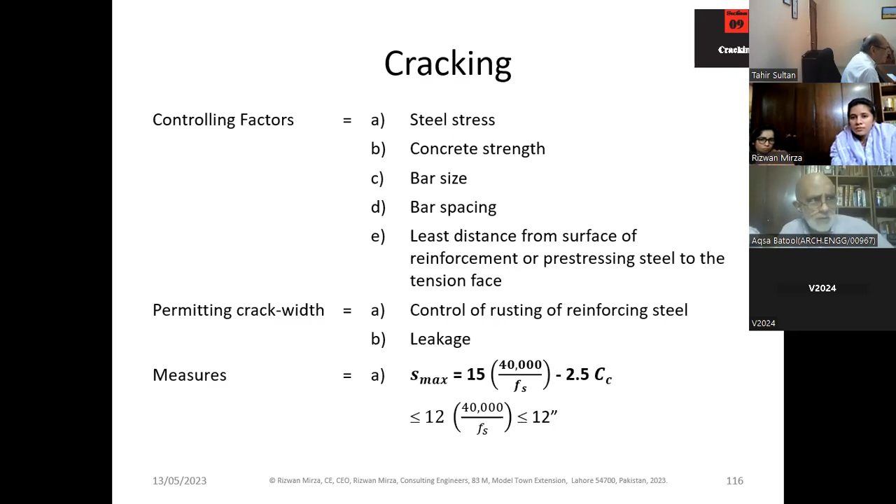And there was a Gergely-Lutz equation, which was part of the earlier codes and doesn't appear in the codes today, but it gives you some idea of the amount of crack width that is to be expected.

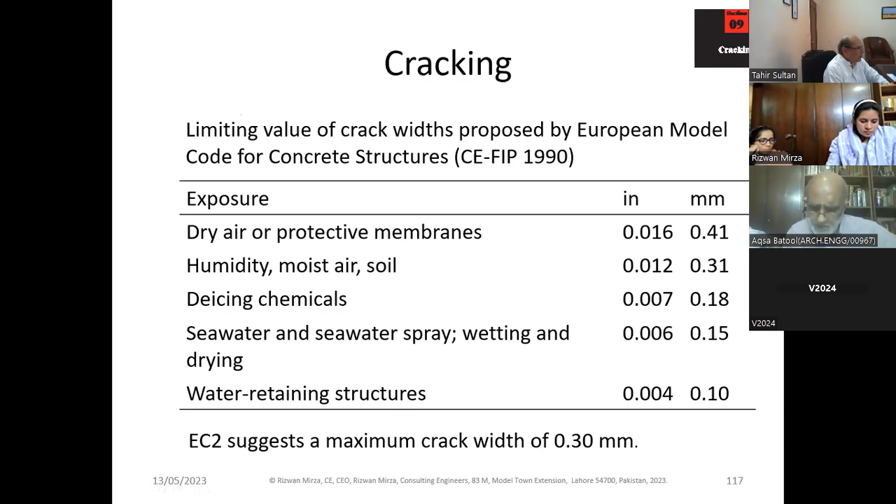0.3 millimeter is the accepted crack width by the European code, Eurocode 2, which is about equal to the accepted crack width of 0.31 by CE-FIP, which is again a European code. This is the last part, second last part of my talk - I'm sorry for bearing with me for this fast-paced talk.

The dynamics of the slab is very important. Resonance can take place. Machine design may ultimately damage the slab - when you design it for placing a machine on the slab, it may ultimately damage the slab, and human perception may have psychological implications.

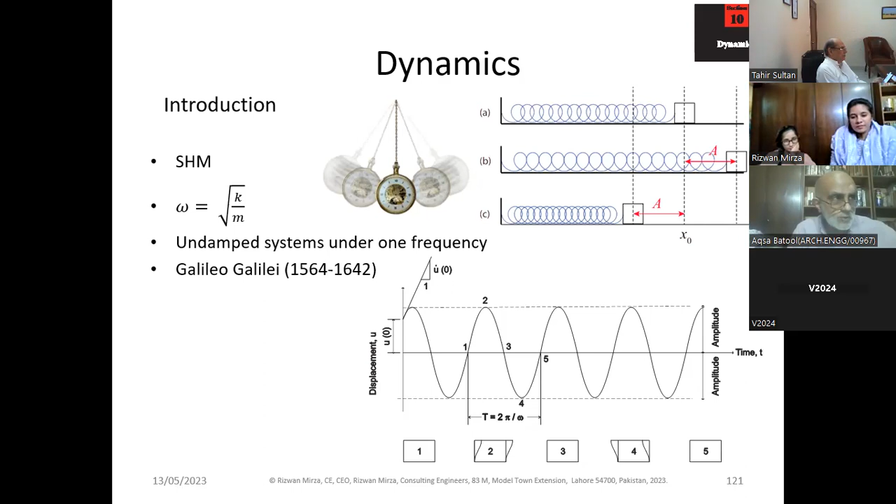This, interestingly, was noticed by Galileo. Galileo was a very amazing person - 1564 to 1642. If I correctly recall, this is the year 1642 when Isaac Newton was born. Galileo used to observe in the churches the movement of the large bells, and he said that he noticed that for every bell, there is a unique period of vibration. No matter how far from the mean position you pull and leave it, it will take the same time for coming back from one position to the other extreme and then back. He was blind then when he dictated this relationship to his son.

This again is an attempt to convert or visualize the sinusoidal movement of a pendulum. This is how the disturbance is, and to a linear movement of a spring - just to give you a qualitative figure.

This is a very interesting recent example from Korea, when a 39 plus 6 storied building in Seoul was noticed to have started vibrating. It continued to vibrate for 10 to 15 minutes, and it was a great enigma for the people, and many people were collected to analyze the problem.

They said that this is basically resonance - one wave with the same amplitude, same frequency, adding up to another wave with the same frequency, resulting in a very large amplitude. They must have the same frequency, and they must be adding up at the right places. So the frequency was noticed to be around 2.7 cycles per second, omega 1 - sorry, this is hertz.

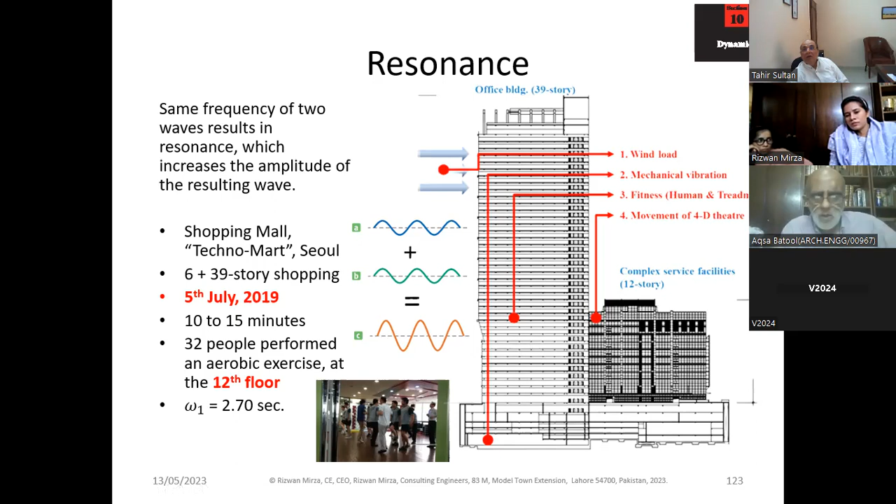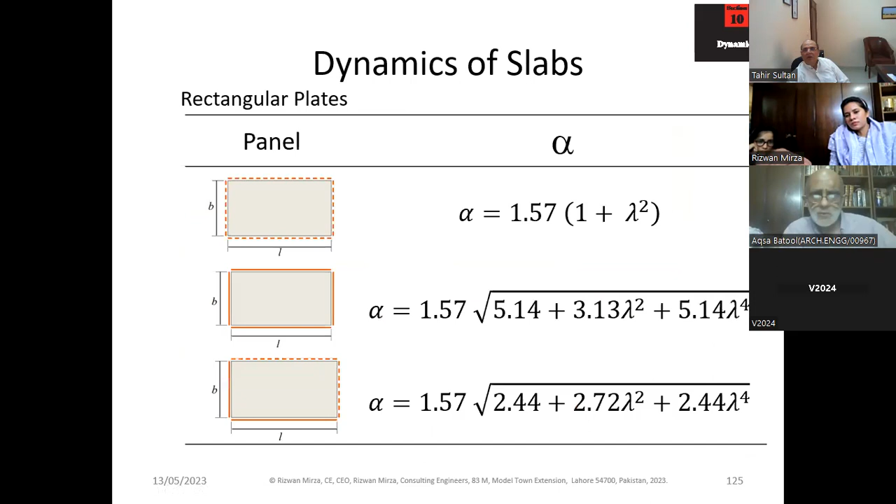Alpha is the constant that you need, and for various values of alpha, you plug in alpha here and compute the frequency: ET cube over 12, 1 minus nu square, counting m out, is the stiffness of the slab. This is like K over m under root.

So alpha is the constant you get from that table, L is the span. So you can compute your frequency, and this is the damping, so that the motion would not go unchecked.

The initial amplitude would gradually be reduced. So you divide the damping into structural damping, damping due to furniture, and damping due to finishes. So the damping would be D1 plus D2 plus D3.

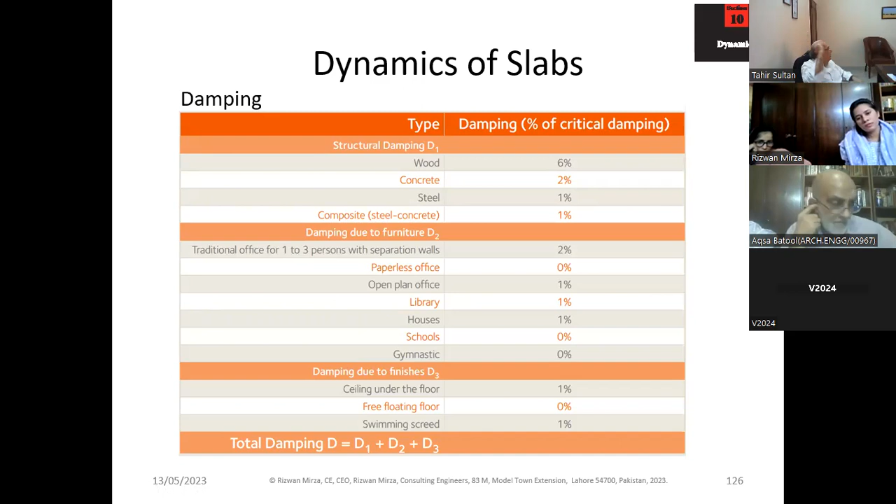Then you determine your natural frequency, your mass, which will be included, and your damping. Read off the one step root mean square value for 90% probability, and then determine the acceptance class.

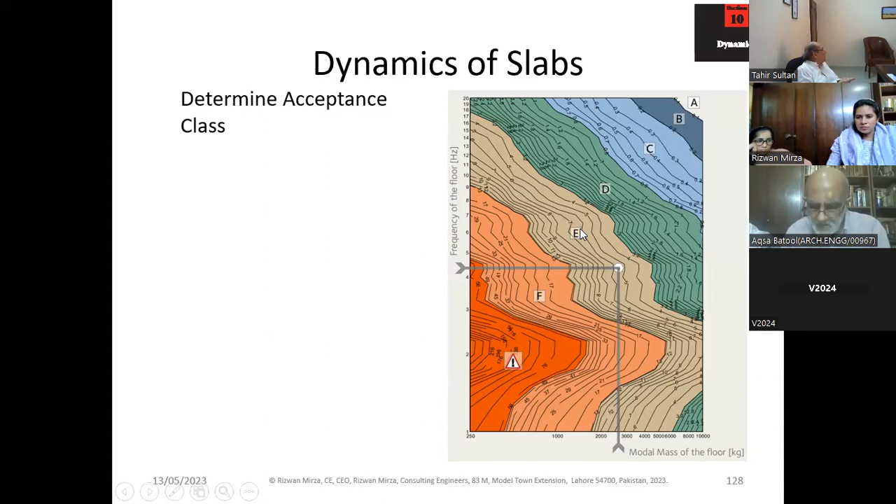Let me take you to the graph. This is what the graph looks like. For the relevant value of damping, enter with your frequency and the mass, and you strike E here, for instance. So this is acceptance class E. This is where it is acceptable.

This is acceptable in sports, in industry, not in health, not in residential. So change everything so that you come here, in the green part.

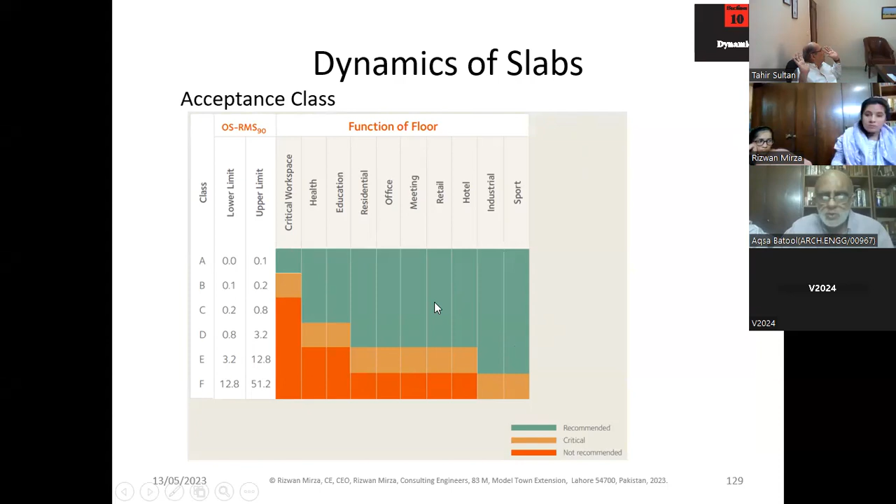See, this is just one diagram. You can look it up in the code.

Except that I must remind you that in zone 2A and 2B, at least, one-fourth of the reinforcement at the top in the column strip must run all the way. You cannot terminate it. You cannot leave this area unreinforced.

There are other provisions which relate bottom reinforcement, not less than one-third the top reinforcement, and similar provisions. These are very simple. If you just get aware of the chapter 21 requirements, I think this is it.

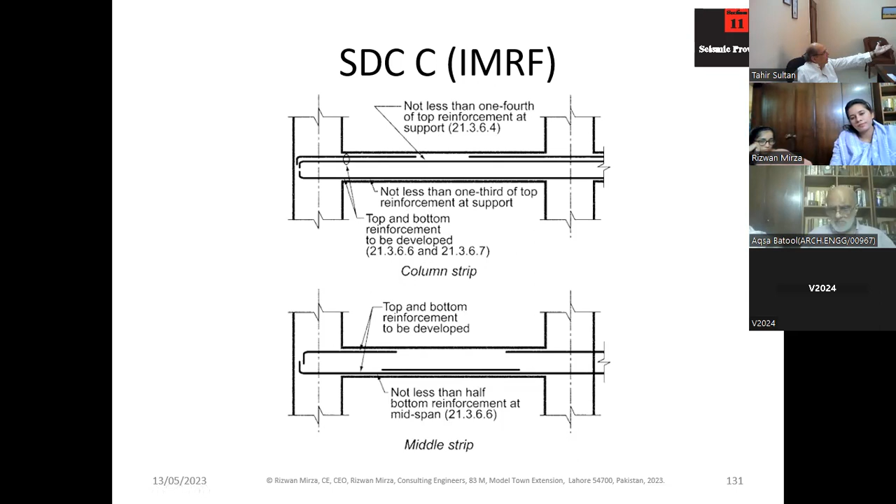So I must thank you and apologize once again for moving so fast. This is not my way. I would tend to speak slowly when interacting with people, especially when talking to my colleagues at my office.